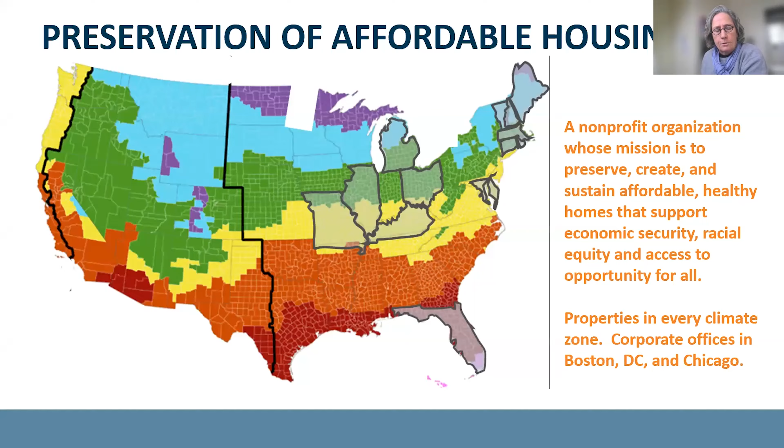So this is Salem Heights. We bought this property in 2003. The whole naming of POAH, preservation of affordable housing, is that the goal of the founder was that if affordability and affordable projects were threatened - this one's affordability contract had run out, was up for sale, and easily could have been bought by a market rate developer and converted into high-end apartments or condos - we worked with the city and a low-income housing tax credit allocation to buy it. But when we bought it, we didn't have enough money to do a typical POAH rehab. So it's...

281 units, built in 1974. The curious thing about 1974 is that there are no shelf angles. The brick is supported from the ground up. Our intent when we started this project was 100% kitchens and baths, and maybe some repointing, maybe a new roof. But what we discovered was that given the brick was supported from the ground up, and the details - while in this image are accurate and are what's supposed to be there - we didn't find this everywhere. We found a lot of repairs. We had water coming in at certain locations and certain weather conditions.

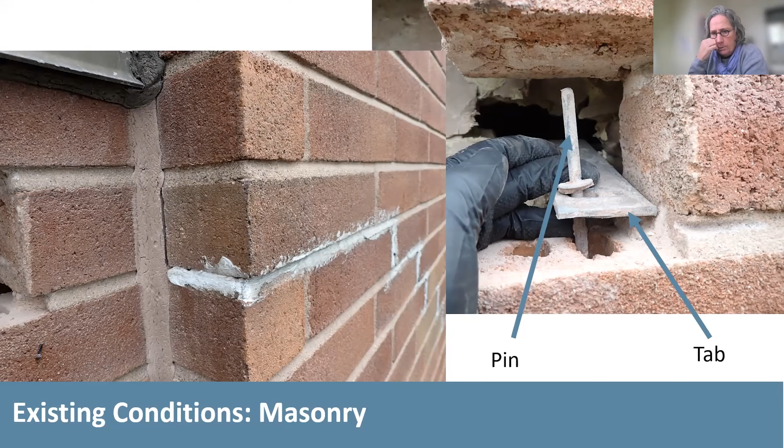And the image with the black hand, that's actually Ken's hand, I think. But this shows the tab and the pin - the tab is welded to our structural steel and the pins installed at the end. Those were supposed to keep the brick up and attached to the building. But what we found was that was not actually the case. We opened it, I don't know if we ended up doing 20 openings, some to see if the structure really existed, where it existed.

We wanted to see what the condition and capacity of the light gauge metal studs were - you can see in this image on the left, structural steel, concrete deck with light gauge metal in between on each floor, with the masonry supposedly hung on those light gauge metal studs.

So what we went with was an Armorwall structural insulated panel, R21, out of the box. The beauty of it is, as you can see in this image, there's the insulation, and then the structure, the sheathing is on the outside. So once we attach this to the studs, our cladding attachment becomes completely thermally broken. It allows us to put whatever cladding we want on there. We achieve the rain screen, the fire protection, and the R value we're trying to achieve. You can kind of see the tab and the pin in section in that one detail.

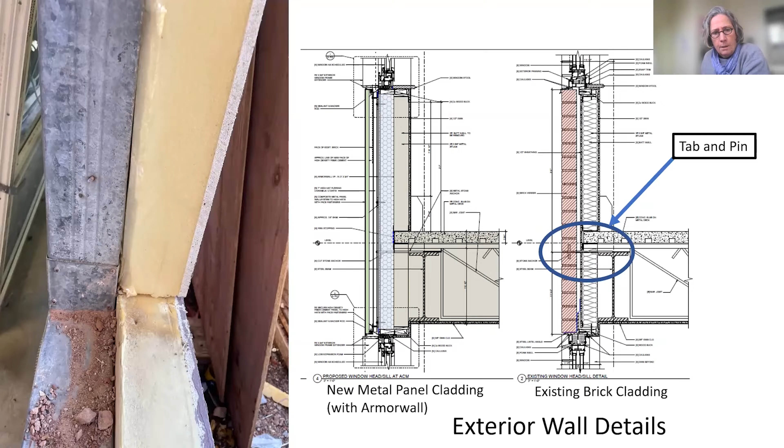So this kind of shows you the three different phases. You can see the brick, you can see the Armorwall with all the black sealant on it - that's the only way you get it to be airtight. The pink color is the air and water barrier, and to the far right, you can see some of the metal panel going on.

You can see how we access this building with mast climbers. On the brick, the square is just highlighting that. You can see a lot of through wall sleeves that were used for air conditioners provided by residents. We also replaced all the windows and reduced the height of one of the windows that you'll see in future images.

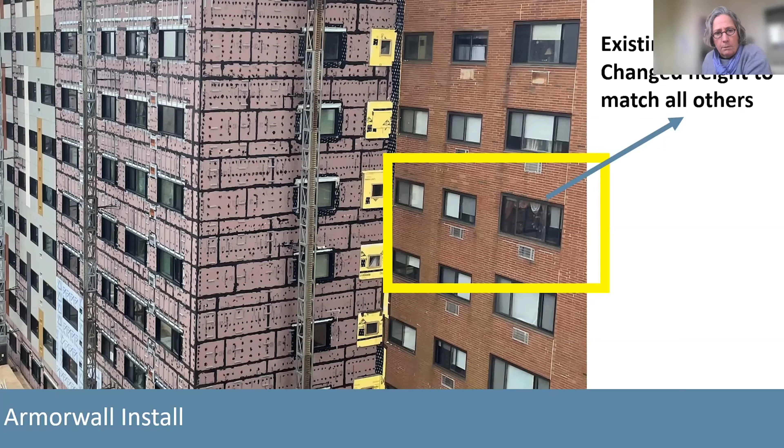So this looks even more further along now than it did, but one just wanted some images to see how the look transformed, and also to sort of highlight the Minotair louvers that you can see in that one yellow square.

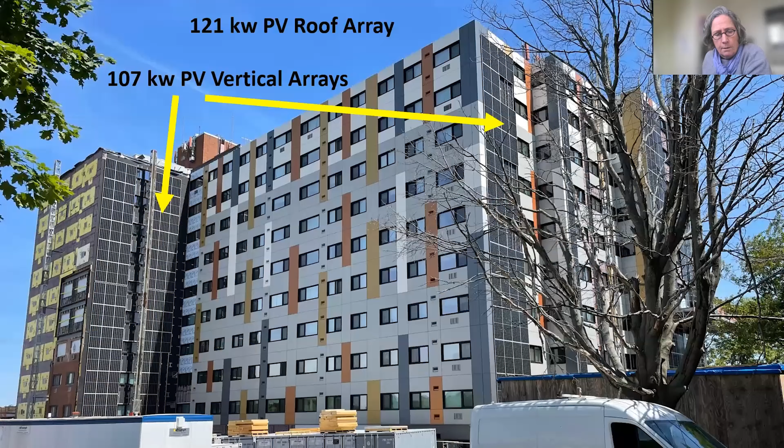Another cool thing on this project is that it sits up on a hill. Given the density, trying to approach net zero is a little tricky because of the roof size, density and electric load. So we decided where we could, we wouldn't put metal panels on, and we would put solar panels on. So we have panels on west and south facing walls.

And then you can see the capacity of the wall. And then this roof of this first tower will get us some good juice as well. Unfortunately, the other building, when we went to replace the roof, we realized the decking is not strong enough at the moment to support the PV that we wanted to put on it.

So we have to sort of wait for a lighter panel or some way to reinforce that roof to get another 120 or more, probably, because this roof has cell equipment on it.

So mechanically, we thought, oh, let's look at VRF on the roof, and we'll put some ERVs per floor. We'll run the ductwork down the hallway and into the units.

And then when Building Evolution went out and did some analysis and peeked their heads up above the hallway ceiling, what we discovered was that there's this giant steel beam that ran over the doors on one side of the hallway. So there was no way for us to duct into units from the hall to provide fresh air.

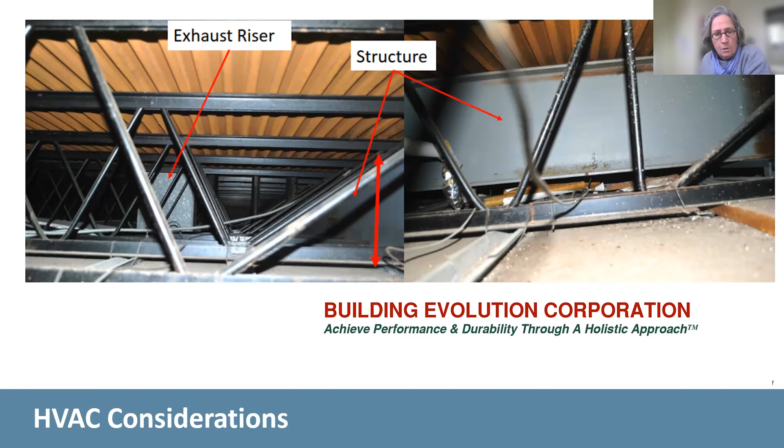So we went for the Minotair, which some of you may have heard of or met Alex at conferences. It's HVAC in a box, heat pump.

And so we built closets on the exterior of each unit. Most of the time we did it in the bedroom in order to leave the living room square footage intact.

You can see in the AXO up at the top how that closet works with the intake and the exhaust staggered up and down on each floor.

And then in the floor plan, you can see sort of the supply to the bedroom and the living room, exhaust from the bathroom, exhaust generally from the kitchen. And then there are exhaust boost controllers, and then a main controller that is in the living room.

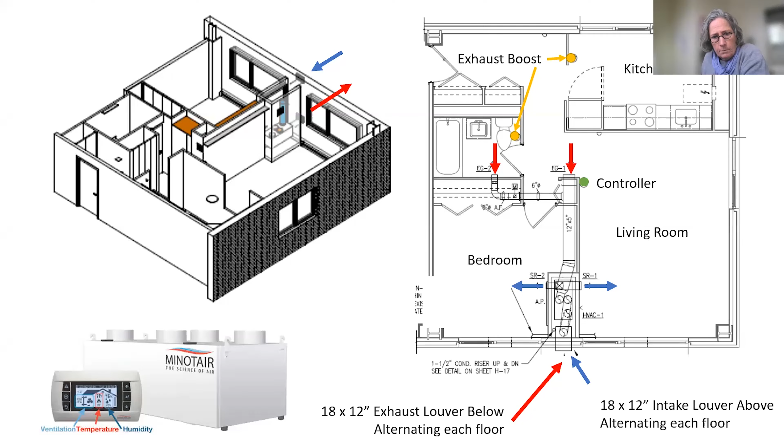So this is what it looks like installed. These are the closets. The Minotair has got some amazing ductwork that's absolutely silent that they want from the unit. And then as you get closer to register distribution, that ductwork has to be installed.

And every step of the way we had some learning curves. You can see in the image with the arrow that there's still baseboard.

We wanted to leave the baseboard in place in order to test our enclosure to see if it was robust enough for the Minotair heating to satisfy the units.

So in order to have those two systems work together, we installed a zone valve to the baseboard that also connects to the Minotair, so that the Minotair can be our primary source of heat, and the baseboard will just come on in order to satisfy a temperature that the Minotair can't accomplish.

So I think that's all there. So the meat of this presentation, and probably why we're here, is to really talk about - we're doing all this enclosure upgrade, new roofs with lots of insulation, good windows, low energy heating, cooling, ventilation system.

So why not passive house? So again, there's some obstacles and some real opportunities here.

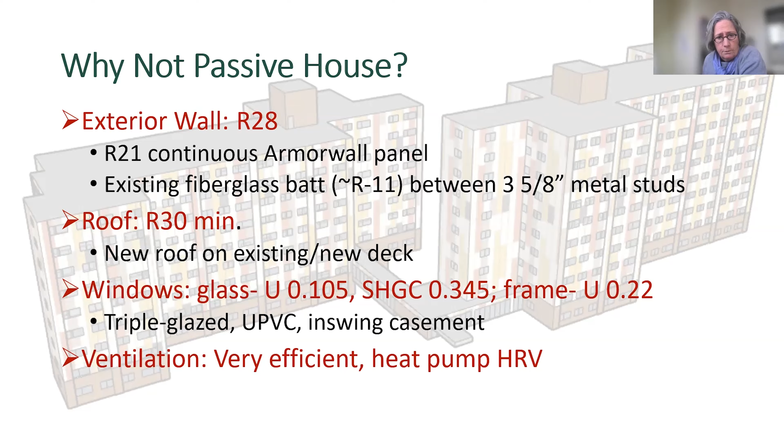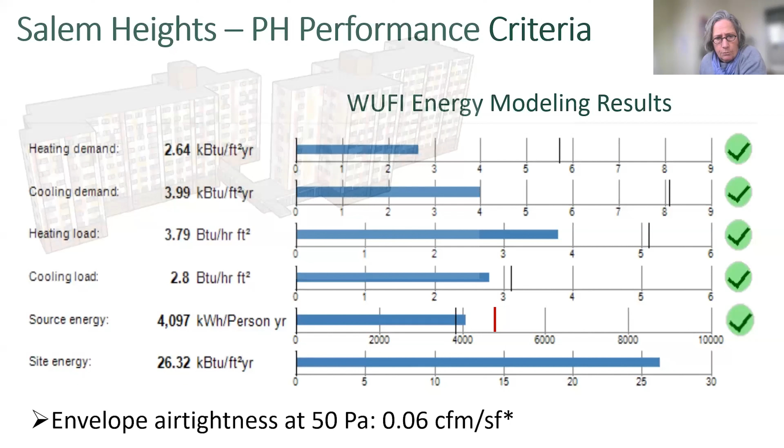So how does it look in terms of performance criteria? It passes, right? Ken explained to me that this source energy, the reason we have a red line there, is because the source energy is really over 4,000, but for some reason when the WUFI model spits this out, it still has the black line or the threshold marked for an older source energy threshold. So anyway, green checks, we're all good.

So the possible challenges here, and probably for a lot of you they're really obvious, right? But we'll get into those. Performance standard - we might hit the performance standards, but what about all the prescriptive standards, not only in Phius, and then all the subset Energy Star, zero energy homes, Indoor Air Plus.

What about those requirements? So BEC evaluated 342, which sounds like a lot, but it was a good exercise to see on a rehab which ones we would easily meet and which ones might be a little bit of a challenge.

So these were the checklists, as well as Phius prescriptive requirements. This is sort of the outcome of that, right? Easily we can meet 184.

Some may be a challenge for all rehabs. Some we need to work with Phius on, and Phius has been great - we've met with them several times. We talked to them about maybe even being a pilot for their REVIVE program, but they wanted us to do this through new construction because we were a little ahead of their REVIVE setup. And then there's some things we might be able to do, but might not be able to verify. And then there are just a few that don't apply to retrofits at all.

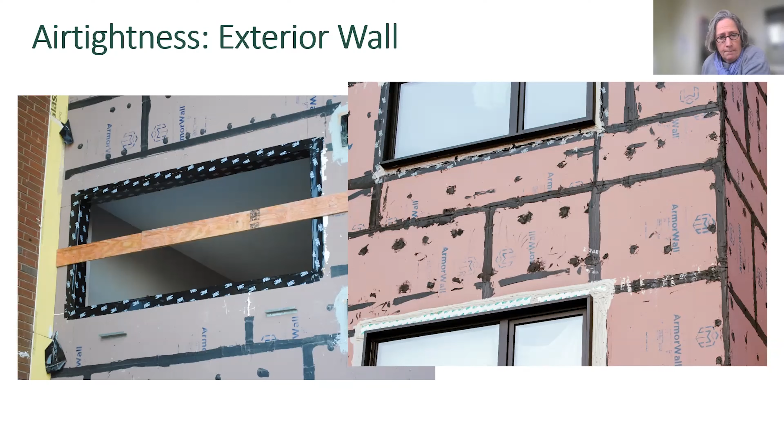So air tightness - specific issues to the project, and then just general retrofit projects. We achieved this with the sealant, good flashing, and that's a lot of surface area, right? So maybe we have a little bit of cushion in terms of air tightness with the size of this building.

We did do a guarded blower door test early on in the building, on one tower, three floors, isolating the floor in between, and we plan to do that again on the same exact floors once we get to that point.

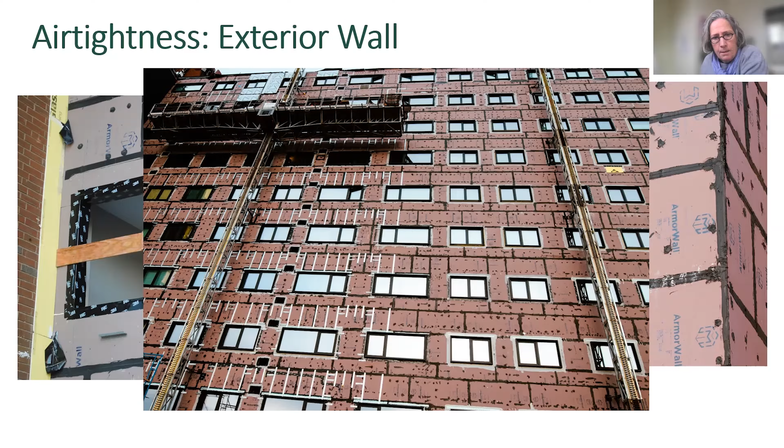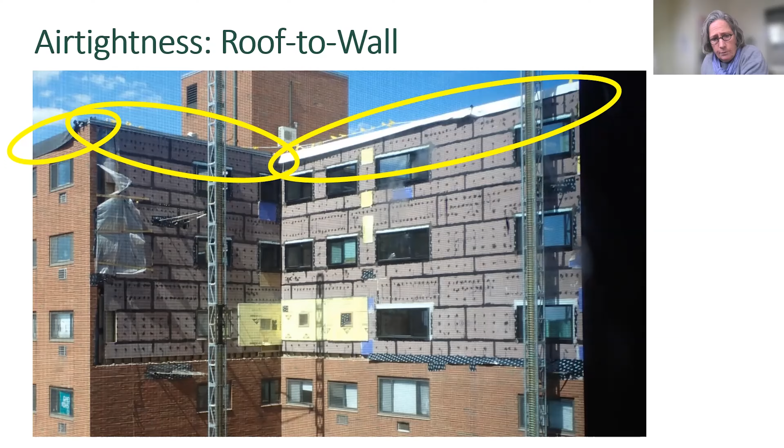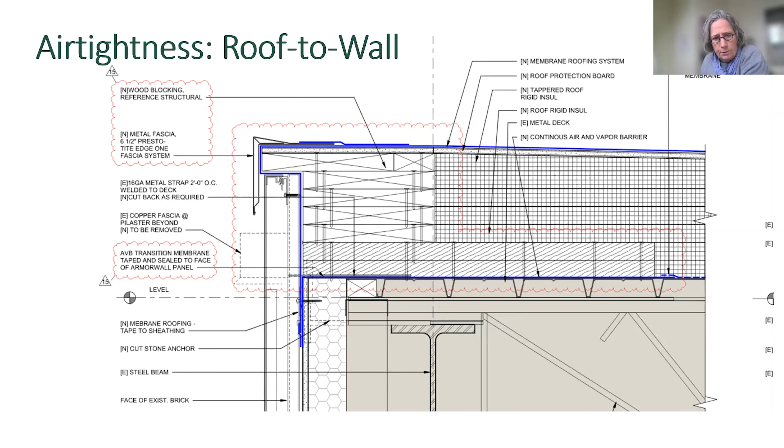And this is sort of what the detail ended up being, in terms of how we did what we did, when. If people have questions about that, we can get into that after, but just to show you our thickness - that's a lot of wood. We realized that we really pushed back on that to try to minimize it, but that's what it looks like in the end.

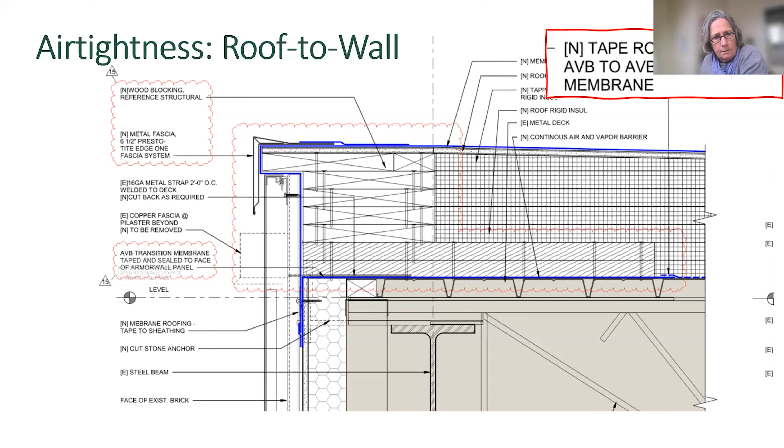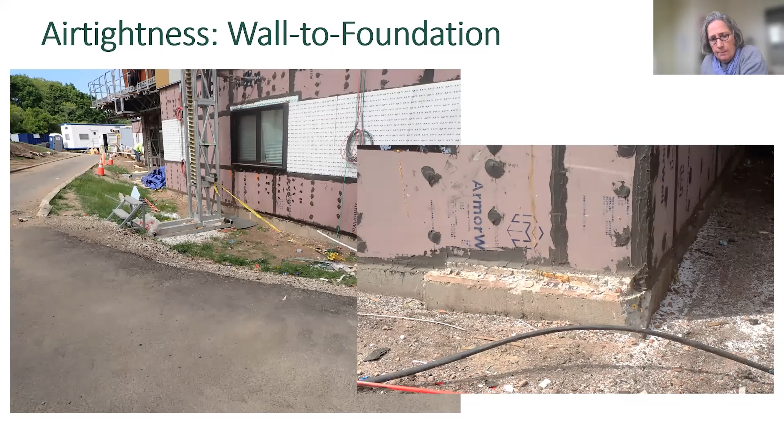Here's another air tightness concern - this wall to slab, which not only poses an air tightness challenge, but we also don't have access to that slab in order to improve the thermal performance.

Windows did fine testing, so we were excited that we didn't have any issues with our windows.

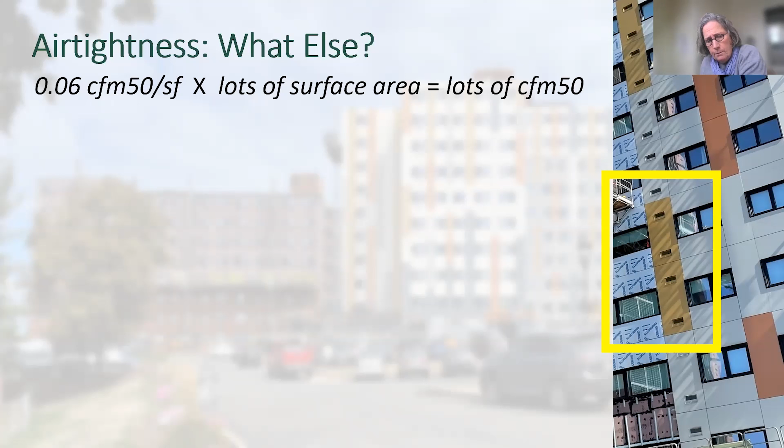The image I showed earlier about all the louvers and the Minotair - you can see on a per floor basis there's two per unit, one's the intake, one's the exhaust, and then it flips on the unit above.

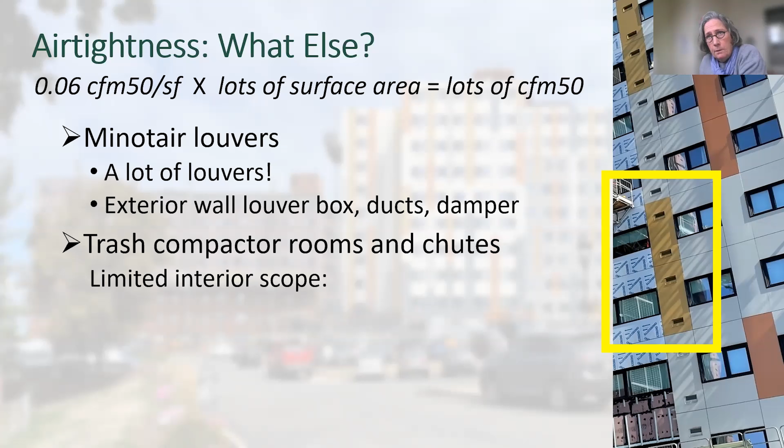Trash compactor is on the interior of the building, and we probably could have tackled that and made those walls sort of exterior walls to try to get that out, and we can still do that in a future project.

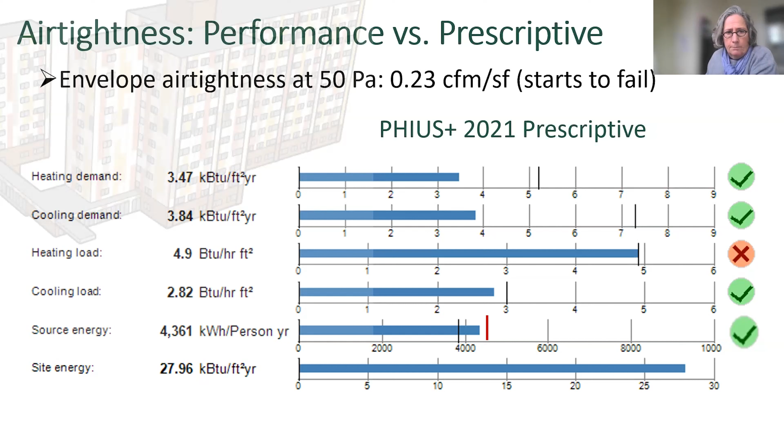So prescriptive - when we start to look at Phius's prescriptive requirements, we start to get real close on the heating load, even with an okay air tightness on the exterior, or some cushion in the exterior. So here's some of the details that are a trick you might find in rehabs - this is a garage ceiling.

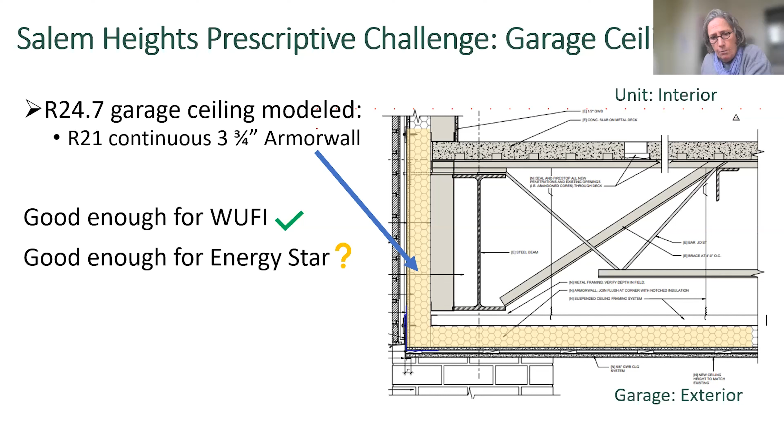So, passes WUFI, but what about Energy Star?

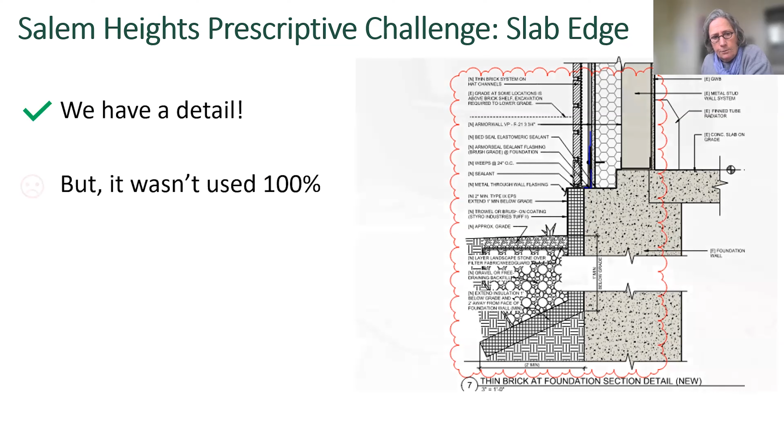Another trick I showed you on the air tightness is for this slab, the slab to wall detail. This is something we want to do everywhere we have to excavate, change the grading, or do any repair work on the edge of the building from construction, but it won't be 100%. As we get opportunities to do this slab edge, this is the way it's been recommended to us to address that slab edge, since we don't have access to the slab itself. But we didn't necessarily get to do that 100% of the time. I'd say less than 50% of this perimeter was done.

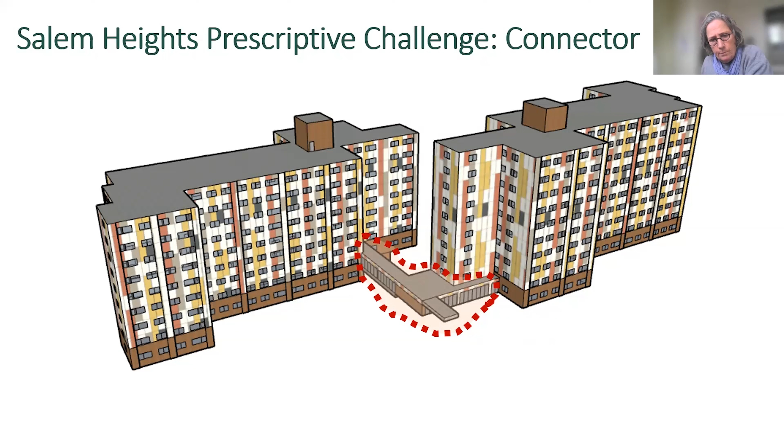The other thing on this building that is kind of a disaster in terms of passive house is this connector. It is wide open. There are no doors from it to the other towers, and from underneath, the floor at this edge is completely exposed. You'd have to do a treatment similar to the garage ceiling.

So for the Energy Star requirement, this is the one that's going to take a lot of time, and probably we'll continue to do it as we do more turns of the unit, given that we had to spend money on the enclosure. We didn't get to do all the unit upgrades that we typically do.

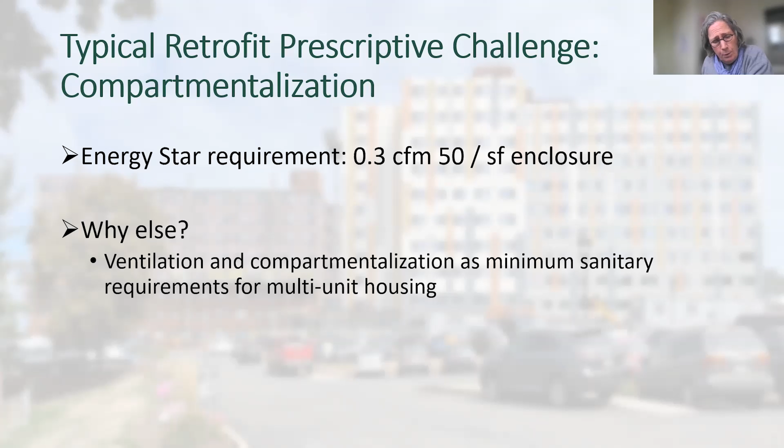But when we touch a unit and do flooring, we seal that joint, wall to floor, electric J boxes on the exterior, and plumbing penetrations. We typically do that on our turns, and we had an expectation that our builder would do that whenever they were installing new cabinets, etc.

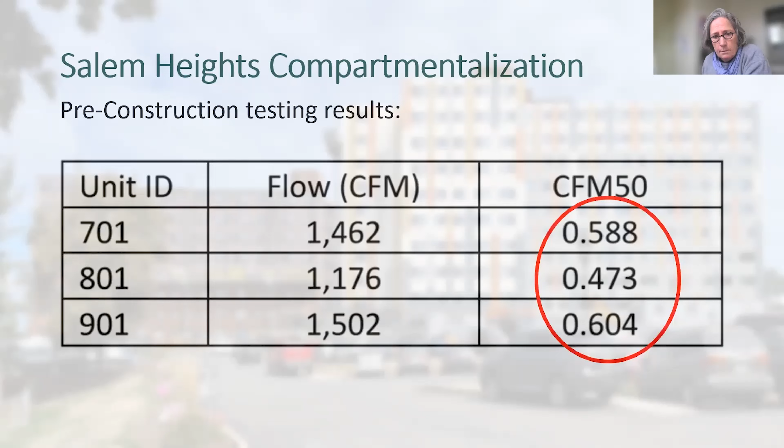So this was our pre-construction testing results, and this is post. Let me go ahead and do the next slide, because the F is not a bad word, I promise. Well, it is, because it says fail, right?

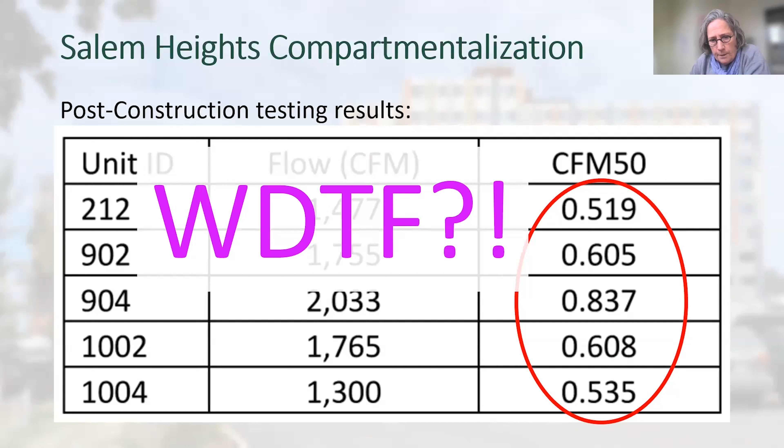So we did pre-construction compartmentalization testing and then post, and we actually blew it on this. What we identified was, and this is an existing unit, something we wouldn't expect our builders to do, but we know we're going to have to hit these spots.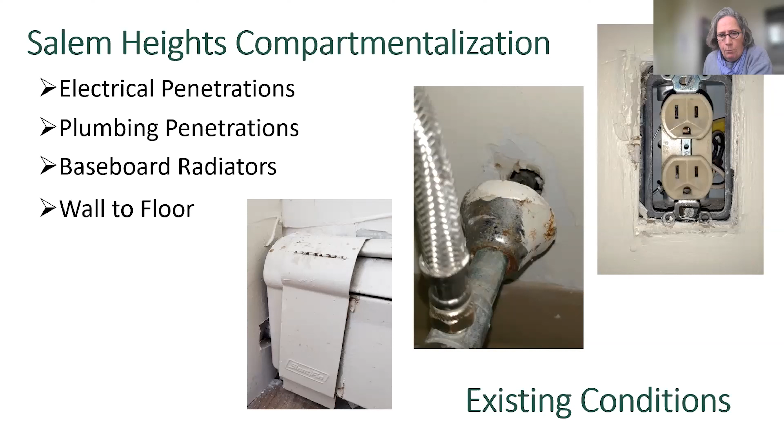Ken and some of his team went in and taped all of these issues, and they were able to half the air tightness in the compartmentalization from what we started with compared to what we tested the second time.

So we know that in order to get close on the compartmentalization, we're going to have to hit all those existing conditions, and then make sure our builder hits all the holes they're making, the duct boot seal. I don't know why that's such a challenge, but it is. And then any new ducts coming in at the ceiling, those all need to be sealed. So those are on a punch list.

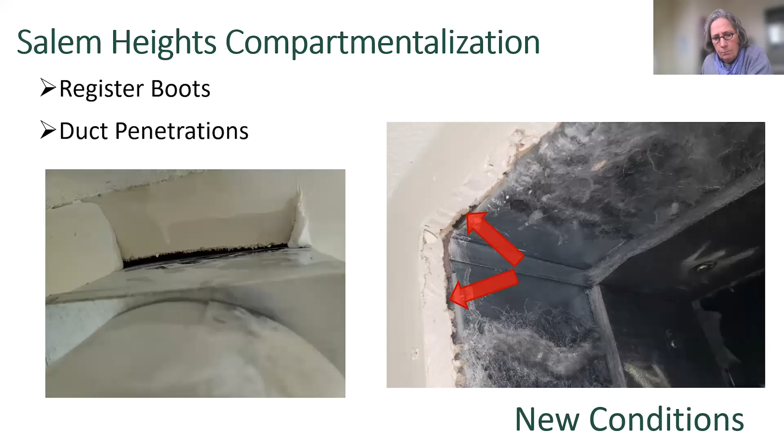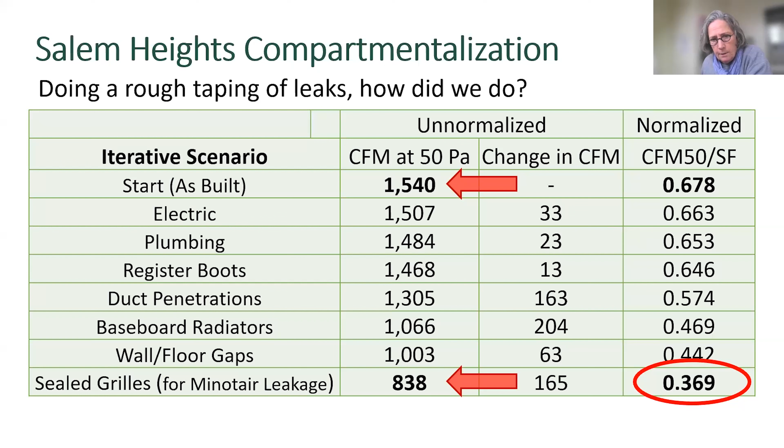We are working on those. We will go back and make them do all the plumbing penetrations, etc. So you can see that when we taped it, we knocked it in half, but it wasn't a great tape job, and we can't use tape for sealant. So we're going to have to go back in there and take care of this.

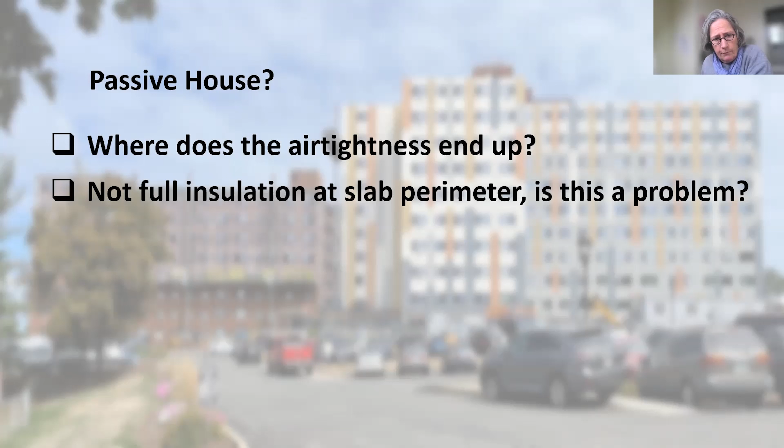So did we get there? We'll see how the air tightness ends up. We obviously didn't hit the slab. It's possible to get to it, but the slab edge could probably make a real difference. So we'll have to see what happens there.

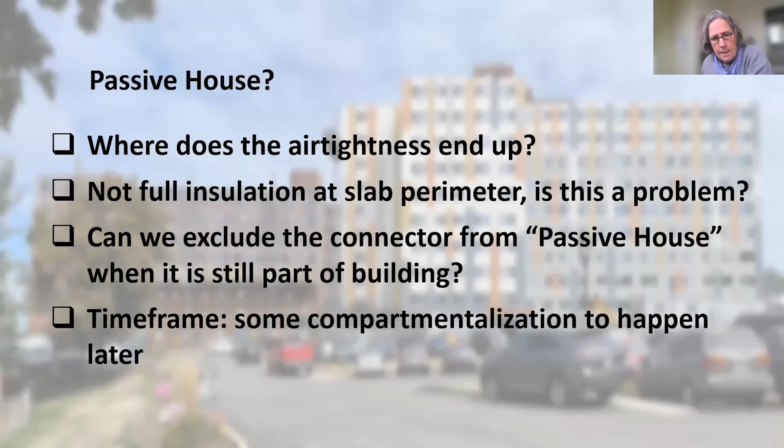And the connector, there are some ways we could probably isolate it, but the program didn't allow for it, and we didn't really have the money to do that. And obviously the compartmentalization was going to happen later, so it remains to be seen.

Before we open it for questions, I want to show one other project that has come from our Salem Heights efforts, a neighboring POAH project of Salem Heights that's actually one of four buildings.

Similar, not as big as Salem Heights, senior properties, much smaller units, but real nondescript brick buildings. The windows are not great. The roof needs to be replaced.

It's fossil fuel systems. So we did a feasibility study with Onion Flats, a GC, and Building Evolution, and a mechanical and electrical engineer, to try to see how we could build these panels offsite, bring them in, and install them, similar to the REALIZE Energiesprong design that the Dutch are doing and RMI is sort of promoting here in the US.

We used Salem Heights cost to see if we could make this work on a cost basis. We want these buildings to all be passive house, and we want them to get to net zero. One of the big things we learned at Salem Heights is it was an occupied rehab, and we thought we had a good plan.

We thought the GC had a good plan, but it cost us over $1 million just to manage residents in an occupied rehab. So that's a cost, and it's also hugely disruptive for residents when you're going in and out of their units in a not organized way, or on multiple occasions to upgrade their units.

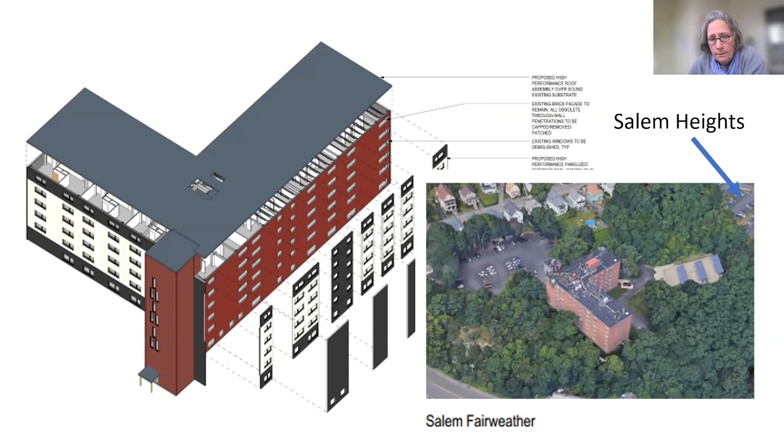So, happy to answer questions, talk about cost, talk about what sort of hurdles we hit that we couldn't seem to overcome. But thanks for having us on, and we'll take any questions.

This is just so interesting, and I think it's very timely with Phius having their retrofit summit coming up. This is exactly what they're thinking about in that process, and how some of these layered-on credentials might not work exactly right, even if we would ideally want to see them in new construction.